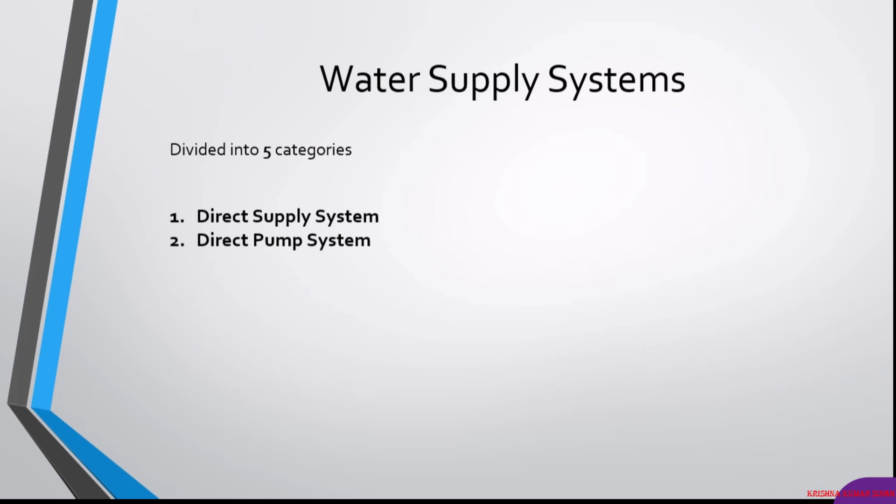So guys, let's discuss the water supply systems. We divide the supply system into five categories. Number one, we have the direct supply system. Secondly, we have the direct pump system. And the third one is hydro-pneumatic systems.

And the fourth one is the transfer pump system, which is mostly used. Now the fifth and last one is the transfer plus booster pump system. In upcoming videos, we will discuss each system one by one in detail.

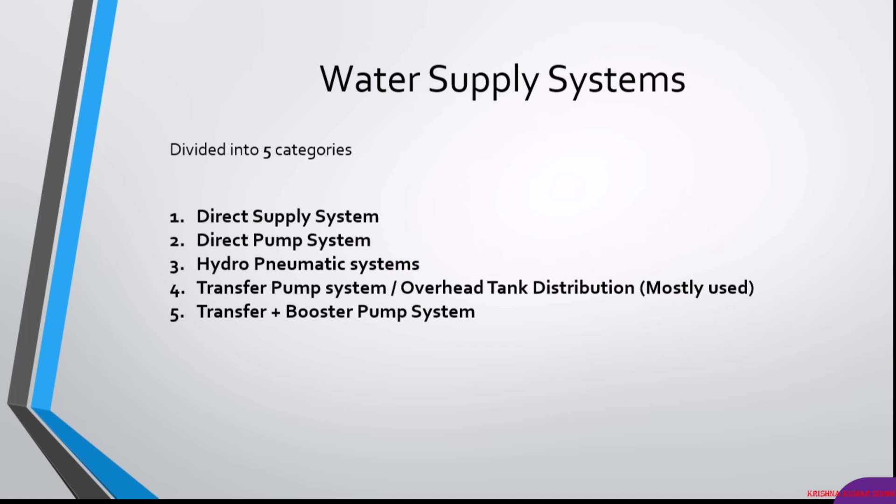Now let's discuss the direct supply system. In this system, you don't need any extra plumbing equipment to transfer the water into your building. All you need is a pipe, the main pipe, which is connected to the city main water lines, right? The city main water lines already have sufficient pressure, right?

So with the help of this sufficient pressure in these lines, we can transfer the water from the lower ground level to the topmost floor of your building. But in most cases, city main lines don't have adequate pressure to get the water from the lower level to the topmost floor without using a pump, right?

So this supply system is only applicable if you have a two or three floor building, right? So with this method, we can conclude that you cannot supply water to the topmost floor of the building. Okay.

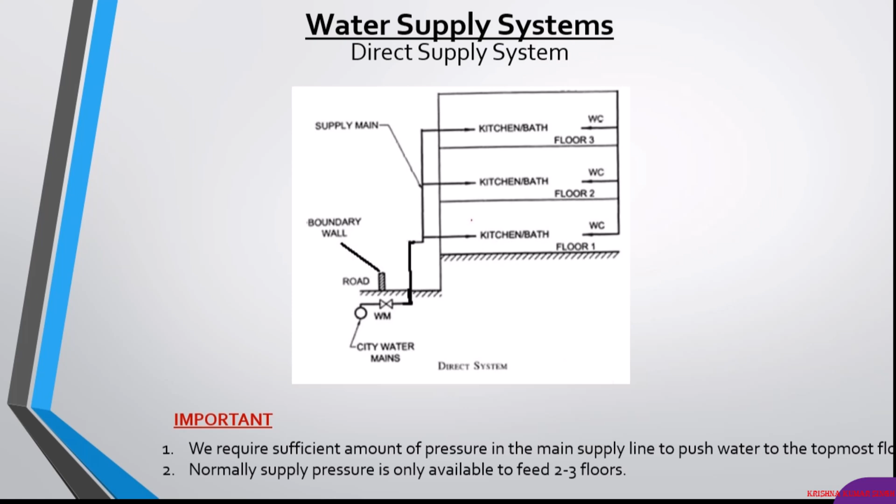Now in the direct pump system, we have a city main water line. From that main line, this symbol is for the isolation valve. Okay, from that main line we store the water in an underground water tank with the help of a pump. This is the symbol of a pump in this image.

Now from there we use another pump to transfer the water from the underground tank to the entire building. This line represents the supply main pipe. Okay. While moving upward through the building, we supply all the floors, from bottom to top. But there is another thing.

We have one more overhead tank. We collect water from that main line, and from this overhead tank, we supply the water to the water closets in the toilets. Okay, because water closets don't require water under pressure, they have flushing tanks installed. So therefore we have a separate overhead tank for these fixtures.

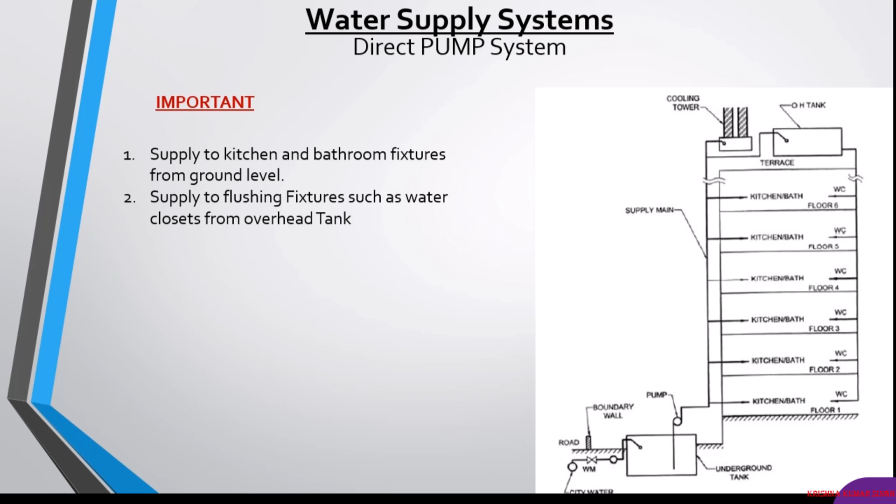Now we have the hydro-pneumatic system. In this system, we have a main water line from the government. We collect the water from that main line in our underground tank with the help of a pump. Okay, and after that we have another pump which supplies the water to each floor of the building. But there is a special thing we install in this system: a compressed air line.

And yes, that's why the system is called hydro-pneumatic, meaning water and air system. We have a pressure tank. We fill the pressure tank with compressed air using the air compressor. In case of water demand, the pumps supply the water from the underground tank to the building. But in case of an increase in demand, this compressed air pushes the water from the lines towards the building, which helps the pump reduce energy.

All right. So the main purpose of installing this compressor is to push compressed air towards the water lines in case of increased demand. Okay. So this system helps in peak demand. In this image we have only one pump, but in most cases we have more than one pump. Like here, this is an actual image of a hydro-pneumatic system.

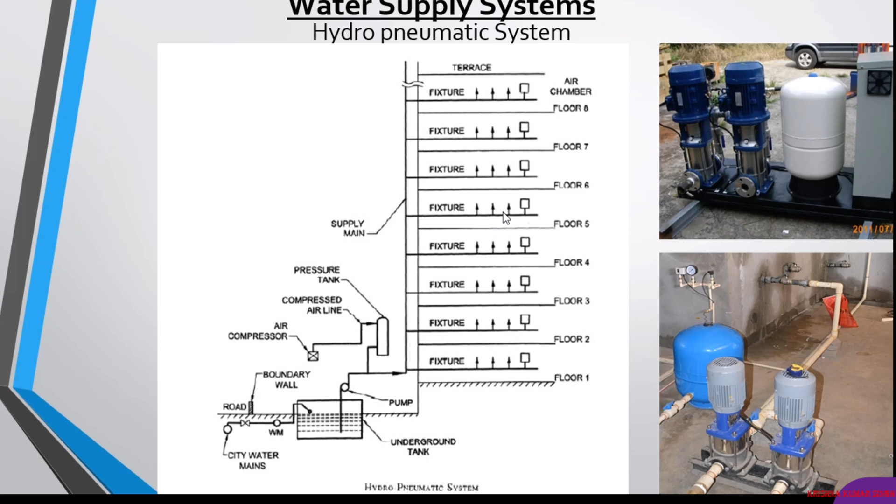Next, we have the transfer pump system. This is the most widely used system in buildings. We have an underground water tank, same as in previous systems, and a pump which is used to supply the water from the underground tank to the building. But in this case we have a main supply line which takes this water from the underground water tank towards the overhead water tank. We have installed two overhead water tanks. Sometimes you can install only one overhead water tank.

Now from ground level, you need to collect that water to the topmost floor. Like in this case, we have a terrace over here. We have installed the overhead tanks in the terrace. So after filling these tanks, we can supply the domestic water from those overhead tanks. But in this case, we use gravity to supply the system. We are not using any kind of pump. Right after the overhead tanks, we directly supply the water with the help of domestic main pipes. These are the isolation valves.

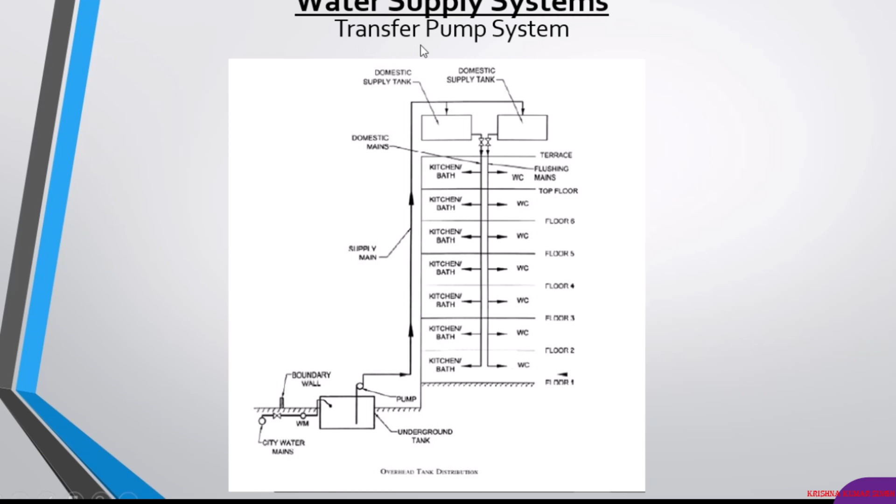Now we discuss the transfer plus booster pumping system. Let me tell you one thing, this system is the same as the transfer pump system, but in this case we install another two pumps right over here. In this image it is not showing any pump because I used the same image from the transfer pump system. There we have two pumps which are used to supply the water to the upper floors. In this case, we have six floors and a terrace over here.

But let's suppose you have a 50-story building, and if you install only a transfer pump system, you can supply water by gravity into the lower floors. But for the upper floors you will get low pressure water in your kitchen and toilet areas. To compensate for that low pressure you can install two booster pumps after the overhead tanks that will generate more pressure to supply the upper floors. For the lower floors you can use the gravity system, but for the upper floors you require booster pumps to maintain the pressure.

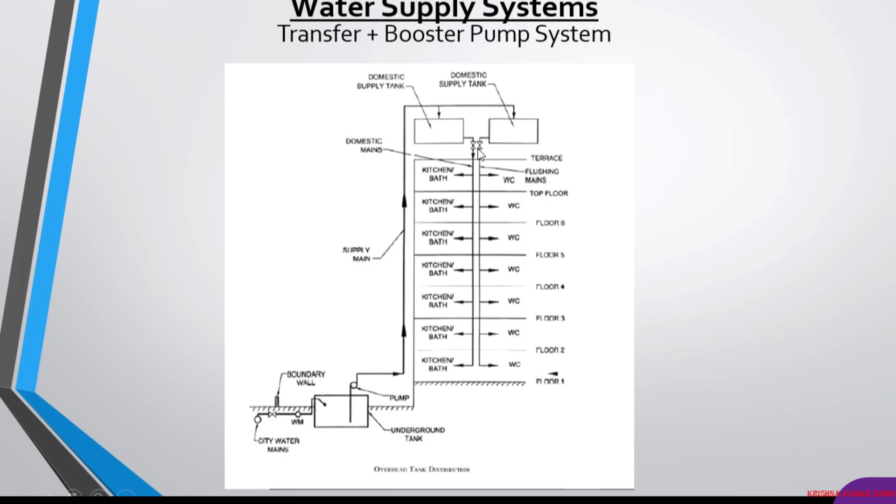Fluid mechanics. All the information about the basics of fluid mechanics I will be taking from the Practical Plumbing Engineering book by Cyril M. Harris. You can download this book from the American Society of Plumbing Engineers bookstore. I'm going to use 3 to 4 books from the American Society of Plumbing Engineers and the International Plumbing Code book as well.

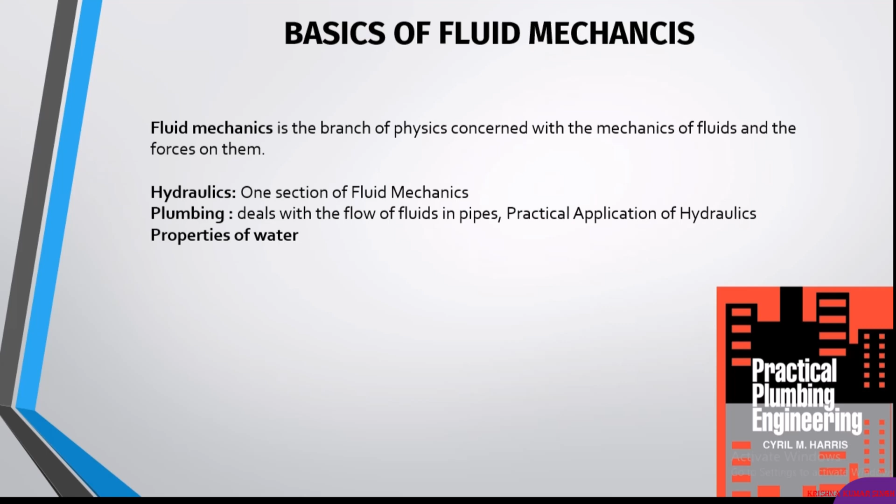So basically, hydraulic principles are based on the chemical, physical, and mechanical properties of water. Therefore, it is very important to understand all the properties of water. So in upcoming lectures, I will brief you about different properties of water. We will study viscosity, density, flow types, laminar and turbulent, temperature effects, and the velocities of water.

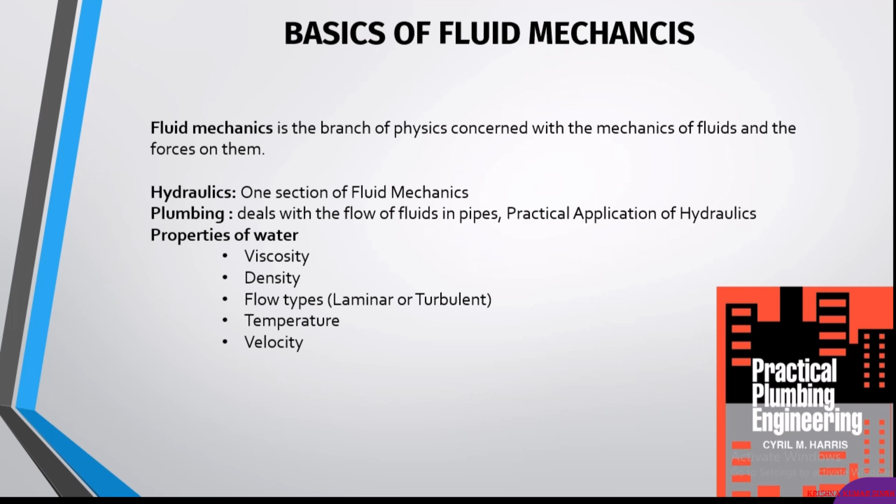So let's start with the first property of water, which is density. Density is a very simple thing to understand. It is the ratio of mass of a substance, in our case mass of liquid or water, to the volume it occupies, right? The formula of density is D equals mass per volume.

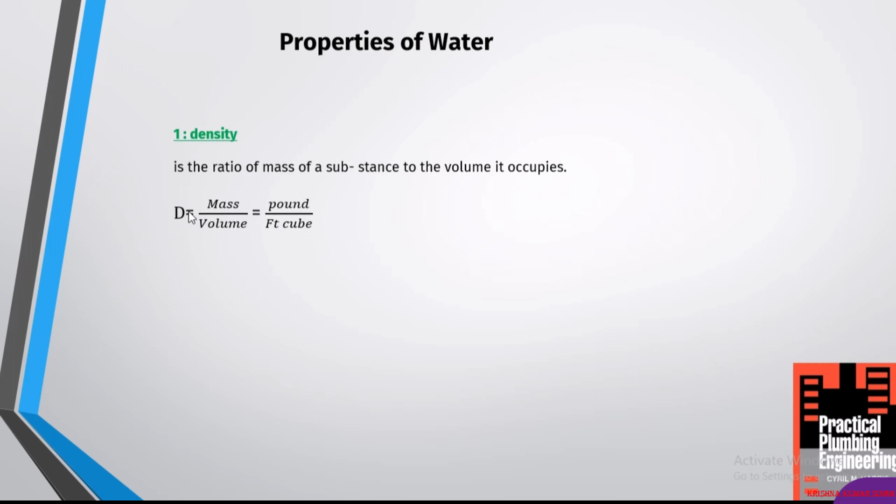Mass is measured in pounds and volume in feet cube. As you know, volume has 3 dimensions: length, width, and height. So it will come up with feet cube. So the overall unit of measurement for density is pounds per feet cube, right? This table is taken from the Practical Plumbing Engineering book, table 3-1, water temperature density correlations.

So if you increase the temperature, the density will decrease, right? But we usually take 62.3 pound per feet cube density during our calculations in plumbing. Plumbing calculation density: 62.3. If you increase the temperature, these are very minor changes. So therefore, we only stick with 62.3 pound per feet cube density, right?

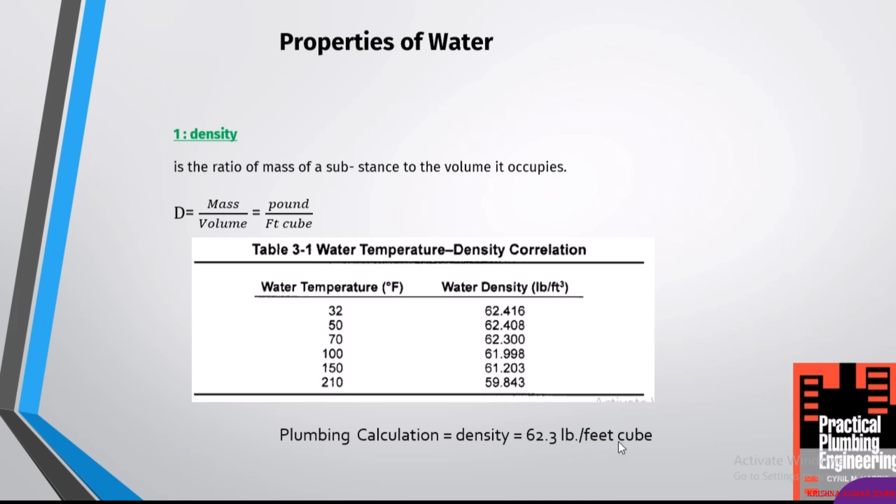The second most important property of water is viscosity. Let's begin with the definition of viscosity. Viscosity is basically the bonding of molecules of a liquid with themselves, right? If the forces among the molecules of liquid are more, then there will be more viscosity. The forces of attraction among the molecules of a liquid or any fluid, or gas, but in the case of gases we might not consider the viscosity factor. But in liquid, it plays a very vital role.

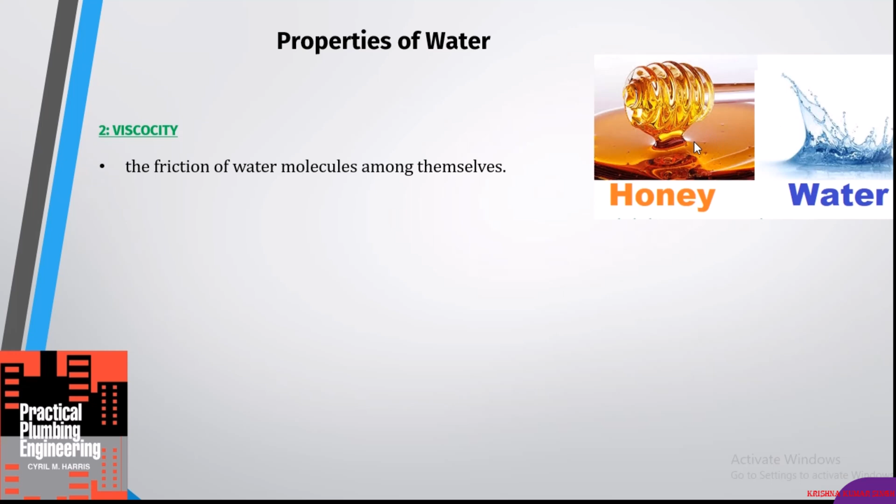So in liquids, if the forces of attraction among the molecules are very weak, there will be less viscosity. Let me give you an example. We have honey and water. You can see here that the honey has more thickness, right? Thickness, in layman language, is basically the viscosity, because it has strong intermolecular forces. Honey has more forces of attraction among its molecules, but water has less. So if you compare these two liquids, honey has more viscosity as compared to water.

The unit for measuring viscosity is centipoise, and at 60°F, the viscosity of water is 1.12. Now, in plumbing systems, if you deal with hot water or cold water, it doesn't make any change in the viscosity of water, right? But if you read textbooks of hydraulics or fluid mechanics, you can observe that if you raise the temperature of any liquid, the viscosity will

reduce, right? In plumbing systems, yes, there is a significant increase in temperature when you require hot water in your toilet or for shower purposes in your washroom. You definitely require high temperature, but that temperature is not significant enough to reduce the viscosity of your water, right? So in plumbing, if you talk about cold or hot water, the viscosity difference is negligible.